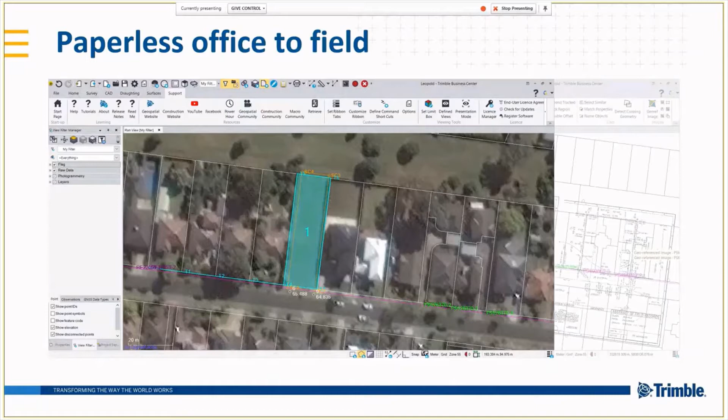Now, the pieces that we lack when we go out in the field, if we're not taking out the paper, all of these additional little descriptions that we would get. These are an example of some survey, they call them abstract field records in Victoria, but similar to a survey plan that you'd see in other states as well. These always contain a lot of extra description, and it's a lot easier just to have a look at a PDF than to be keying in all of these additional attributes and notes and descriptions on a point that you then have to interrogate in the field. It's nice just to still have that aspect.

So what we do to help facilitate that is Business Centre has tools for georeferencing images. It also has tools for georeferencing PDF and anything of that type. If, for instance, the PDF had been created from a CAD package where we get what's called a vector graphic instead of a raster PDF, then we're also able to leverage that and re-extract the line work.

These ones happen to just be a raster, so all we get is an image by itself. But even in doing that, we're able to place the PDF so that it sits where the particular parcel re-establishment was, and the scale on these is never as to scale. So what I like to do is just position it relatively. You get most of the detail that you need without having to occupy the entire sheet space.

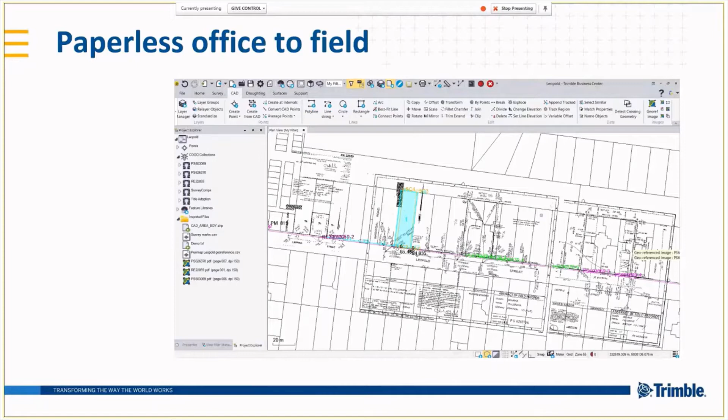And there it is overlaid, a little bit easier to see where the map base has been overlaid and also the existing surveys.

So now when we open up Trimble Access, what we start to see is our cadastral map base as a background, and these are applied in this case as an active map, so the line work is selectable, although it's rarely to scale so that wouldn't be usable for re-establishment. The map base is always made a little bit ambiguous, and the accuracy isn't down to the level we'd want as surveyors, but it's quite good as an indicative way of working.

But you can also see here, with a slight transparency applied, the survey notes as well. So here we've got our survey. It's down Leopold Street. This particular survey was in reference to this parcel, so I've scaled it based on one of the sides there, so we get roughly the right dimensions.

We can also have a look while we're in the field, and normally we'd better check what the next image is. Yep, here we go. We're connected to a GNSS, and we can actually walk over the map, which means we could roughly see what the descriptions were for these survey marks as we walk along out in the field, for these being might be a rivet or a chisel cut or some other survey mark being placed.

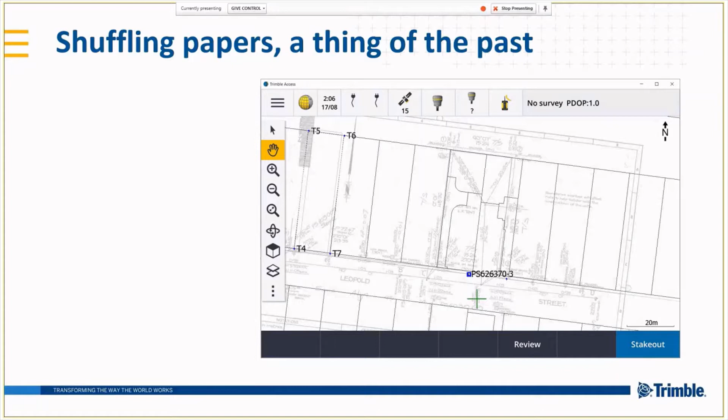So one of the aspects of this was how could we complement traditional survey with drone survey? If the actual drone survey was able to be processed a lot quicker, then we may be able to leverage some of the deliverables coming from that out to the field. But that doesn't exist yet, just because of the limitations of uploading and downloading, and also computing those deliverables.

So I've replicated what the workflow would be, but it's still a decent way of looking at how these things can be utilised, and you might find an application for them as a feedback loop from survey processed in TBC and UAS Master, and then pushing back out to the field.

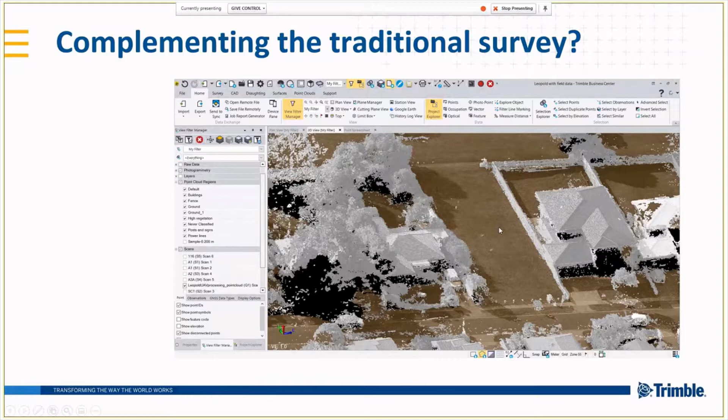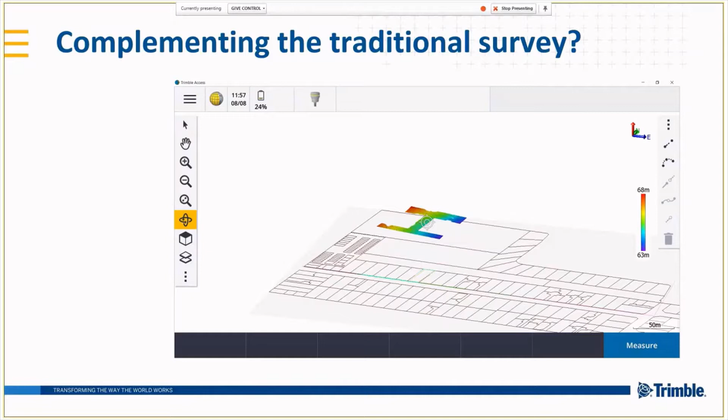So in this case, you could see the drone survey over this particular parcel, and we get some surrounding information as well. And then what we're able to do is create a surface from that and send it straight out to the field, so that we could be working with a relatively accurate surface to begin with if it was prepared with an RTK drone. And then as we work, we complement that and start to build it up, so we see a bit more information coming through.

Now, with a number of instruments that we have available, the S series from the S7 and S9, and also our flagship instrument, the SX10, we also provide a function we've copyrighted as Trimble Vision. It's an embedded camera so that we can see what we're looking at on the controller as what the instrument is looking at.

And it also helps to provide documentation for what we've actually done in the field. I think that adage of a picture being worth 1,000 words is quite valuable here. If you've got surveyors out in the field preparing detailed field notes, sometimes I've used things like Google Street View when information didn't quite make sense back in the office. But with this vision technology, you're able to capture panoramas to help with what's being documented in the field.

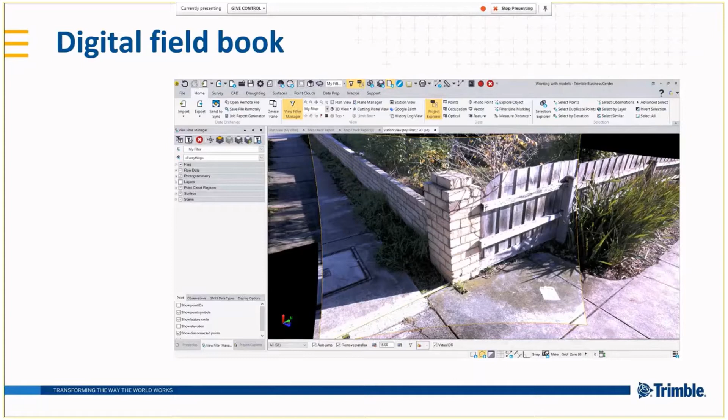If necessary, taking a step further, you can also use a scanning function. In this case it's done with the SX10, but the S series, S7 and S9, also provide a very light duty scanning function, so if additional information was required rather than just discrete points, we can capture that, see it overlaid with our imagery, and take that back to the office for analysis too.

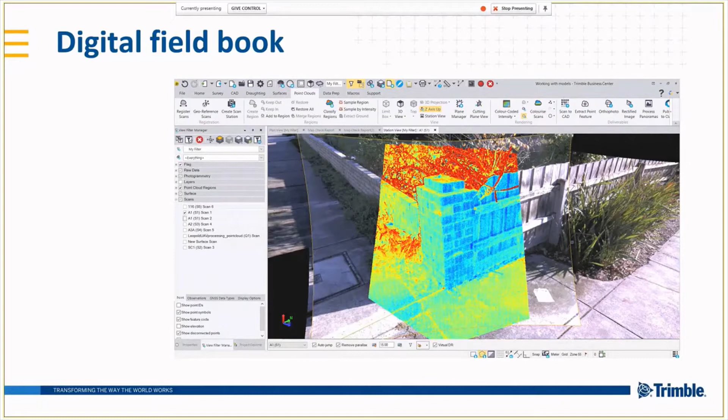One thing I find interesting that doesn't get used more, perhaps it's just around knowledge of how these tools can fit together for documentation and quality assurance - in Victoria, the way I was trained on doing cadastral surveys, we would always take some sort of independent check, and a lot of the time this is done through a taped offset.

So in this regard, we've taped our offset. We're actually using the SX10, facing down and aiming the instrument at the tape. In this case I've captured a photo without the crosshair applied over the top, but I have stored a point so that we get an exact point overlaid at the same orientation as the image. So we could see that this was measuring 1.03 meters.

Yeah, and able to use that as a tool just to verify that there haven't been any typos out in the field. And this all flows back seamlessly to Trimble Business Center just via the synchronizing embedded in Trimble Access. That's consistent for - although the TSC3s don't work with SX10 - there is also that synchronizing function and vision function that works with our more traditional S-series instrument with the TSC3 as well.

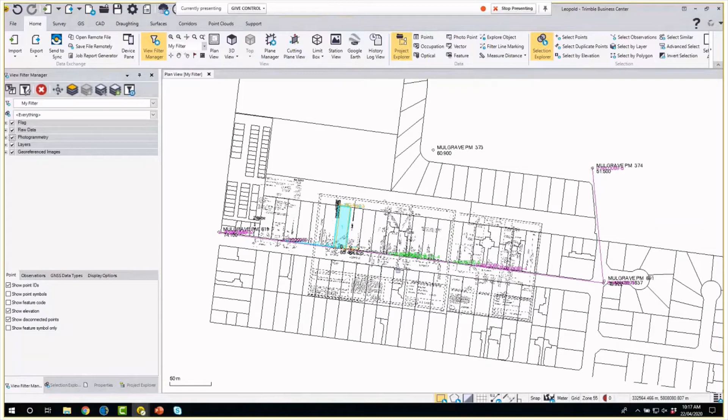So this was the job that was prepared for taking out into the field. And if we zoom in here, you could see how these have been placed and some of the detail that exists on the PDF so that we can actually utilize this information as well. It gives us a lot more than just what we would generally key in, starting from scratch of keying in surveys.

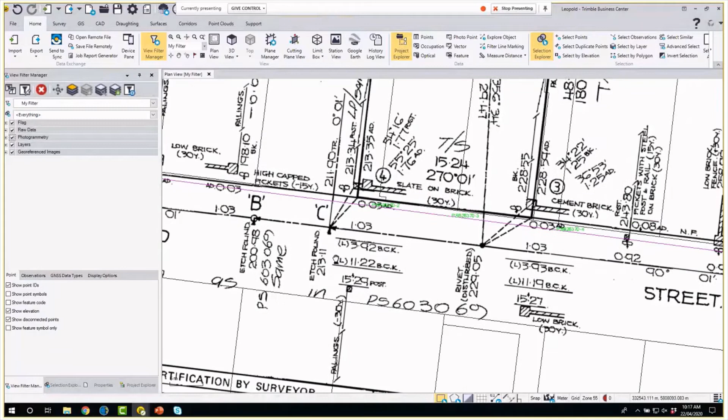We haven't quite caught up with New Zealand in being able to leverage an automatic download of all of this survey information from a database, but we'll get there one day. So for now, this acts as a pretty good way of doing these things. We just drag and drop the PDF, and what you'll see is if you drag a whole PDF in and it has multiple pages, each page comes in separately.

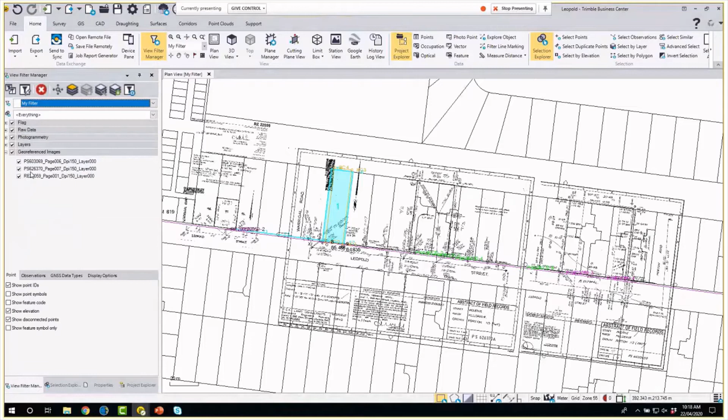So I've got 3 different surveys here, but you can see I've taken page 6, page 1, and page 7 from these, and I've only georeferenced and retained the pages that I actually want in the Business Center project, just to help clean up the data so that I'm not filtering through things that I don't want and leaving legacy items there that aren't required either. I'll just turn off some of the layers and only keep this. As you can see here, it's nicely georeferenced in.

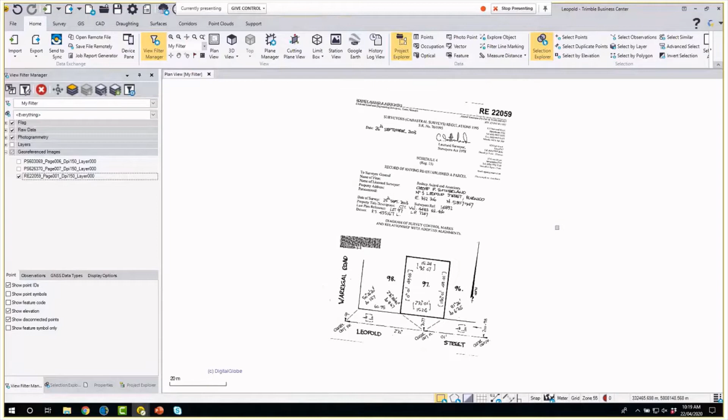One of the tools that we can also use to assist with this, if we didn't have any survey information to start with but wanted to take some of this information out in the field and use a more paperless workflow - just down in the bottom tray here, we've got our map views that allow us to toggle the background map. And if I zoom out and let that cache for a moment, we'll see that it starts to be overlaid and applied here.

And we can set things like, I'll jump into here, this one, properties. We can apply transparency here just to help with seeing where that is in its real world location as well. And obviously you can see here the scaling of these particular documents is quite a bit out, just to be able to fit on a single sheet.

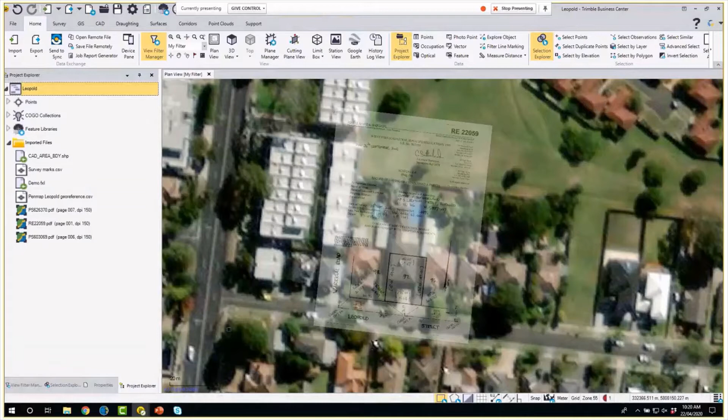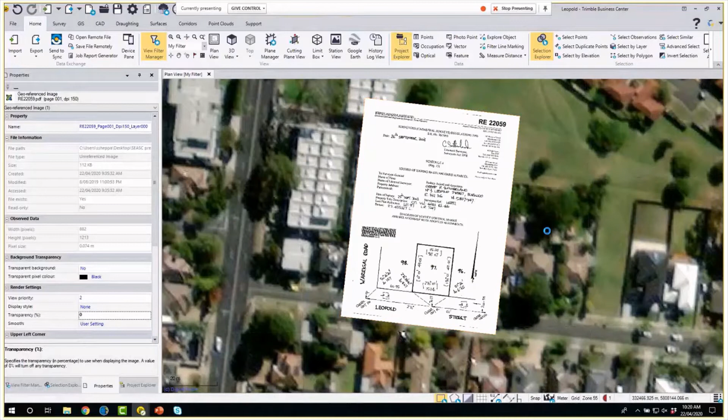If you're not aware, when we're using the background map, we can also come up to the properties of the project, and we can change that from the DigitalGlobe imagery you're seeing there to Trimble Map View, which is effectively like a Google Maps version. So you get the actual street labeling and generic parcel identification rather than what we're seeing there. Okay, so I'll change that back to have no transparency applied, and I'll remove this.

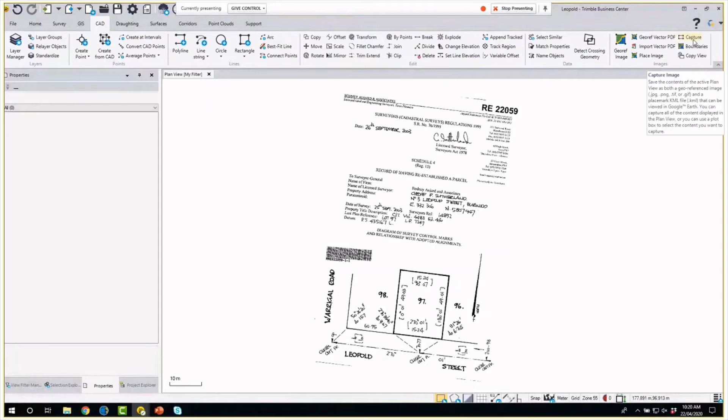So when I've done this and wanted to take it to the field, then just under the CAD tab here in the ribbon, we have this little button for capture. And it can be capture for anything. I quite often use this to capture a nice three-dimensional view of a surface or some stockpiles, and then apply it to some custom reports in Word that we can run out of TBC. But in this case, we're going to use it to capture a TIFF image that will be taken through to the field.

We do have a few different options we can leverage as file formats for doing this. I find that the TIFF image, although it is slightly bigger, the way that it's being stored tends to operate a little bit quicker, and you'll have less latency when you do get into Trimble Access. It is a lot more beneficial on Trimble Access in a TSC7 or a T10, something running on a Windows operating system like Windows 10, rather than the TSC3, where the size of the screen and the limitations of the computing on that device meant it had to be lower resolution, and the benefits just aren't as sharp and clear as what you do get from the newer controllers.

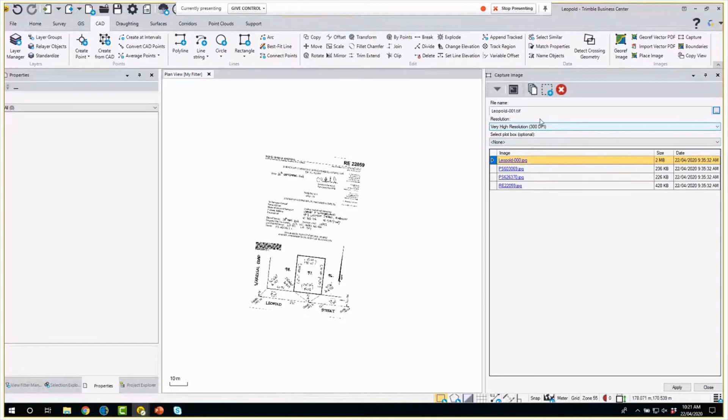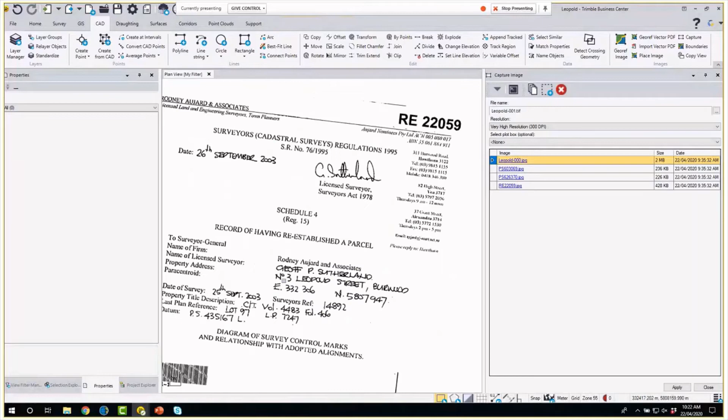Always use the highest resolution you can, and depending on what details you want, you don't necessarily need to take all of this information. You can just zoom in, and if this was all you really wanted to see, then we can hit apply and store that. Now, I'll do that for a moment. Apply, and we've just stored our Leopold-001 TIFF.

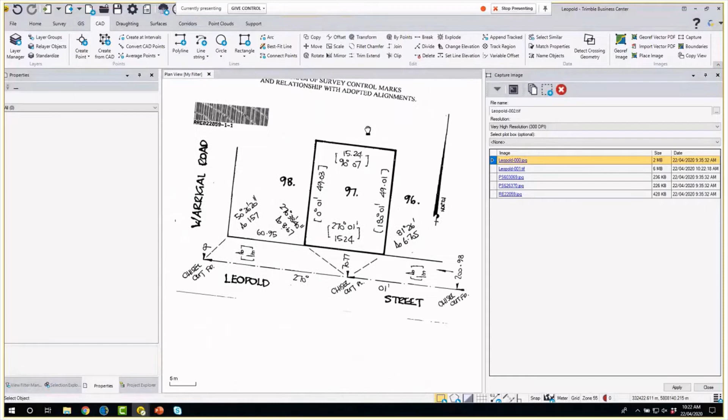If we wanted to be quite specific in how we took this information out, then we could use the plot boxes available here. I haven't created one in this instance - it's sort of a quick and dirty workflow. But if we did, then we can specify an exact boundary around this as we create the images. We can also just grab into this, see what it has stored, and go from there.

Okay, and just to explain what's in the background of these, hold on one sec. I'll go to this one, snapshots. So when we create these, what we get is this TIFF world file, and this is what makes the whole workflow nice and easy, that it just opens straight up, and we don't need to worry about where it's going to be placed. So that information gives it some coordinates, some rotations, and away it goes, so that as we jump into Trimble Access, it just works straight away.

Now, synchronizing to Access, I'll just go to Trimble Sync Manager and let that open for a moment.

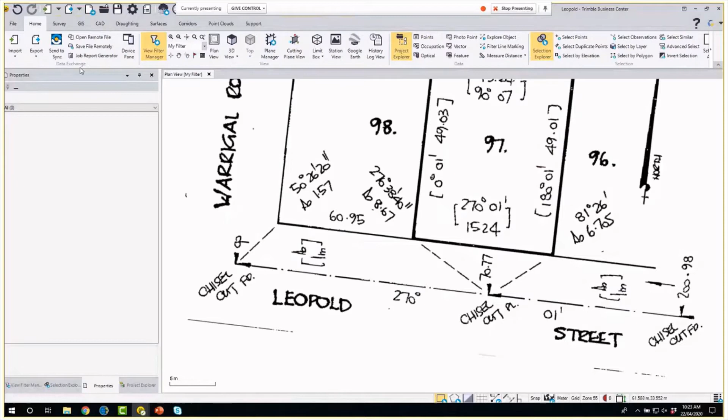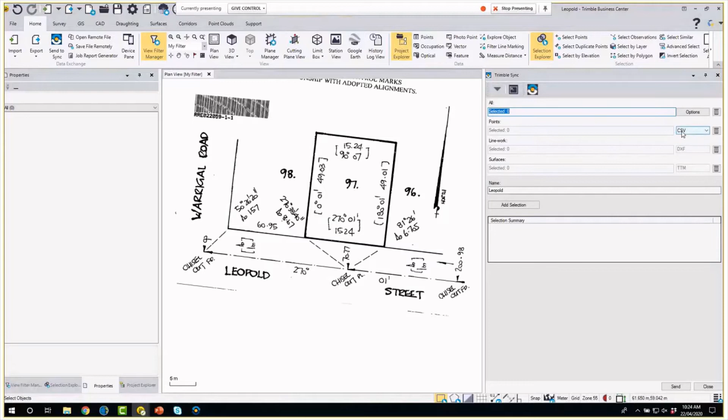From Trimble Business Center, we have embedded a send to Sync Manager function, and that will package up points, lines, and surfaces. I think that's been covered in one of the other sessions in more depth, but it allows us to link these files into a job that we're creating in the office to be sent out to the field.

Now I'll just open up this job. It's a slightly different one, but that's okay. All right, no, I don't want that one. I'll just create a new one.

So in this case, we get project files, so they are consistent across the entire project. They're not going to be in every single job that's created within a Trimble Connect project. For functions that sit outside of where we see here for points, lines, and surfaces, in Sync Manager, it just becomes a case of either clicking to browse to what you want, and depending on how you add it in, if you only want it existing on a single job, you just do it here. If you want it in the project, you do it through there.

I'll just jump to here and go to snapshots, and I just created this TIFF file here. Quite simple, just load that in, and that would now be sent, and as we start Trimble Access, it would automatically synchronize and become a background map in there.

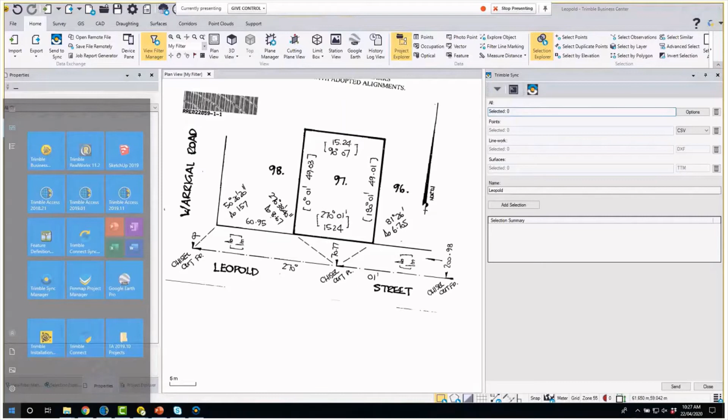I'll fire up Access just to see it on the end side of where it feeds into and what it looks like. Should get there. Come on. Yeah.

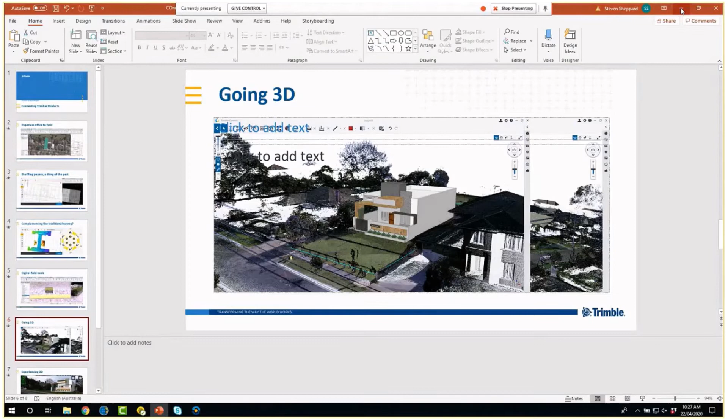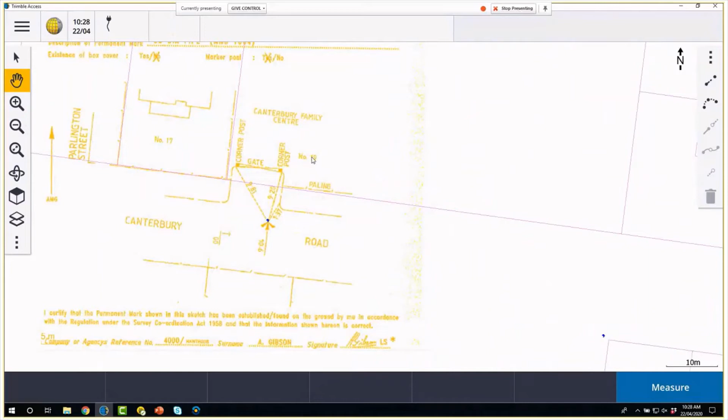Similarly for this, let's switch this one on. I did something quirky with this one, but we could see that dropping in there. Thought it might be more visible doing it in yellow when I'm out in daylight, just as a test for this particular one.

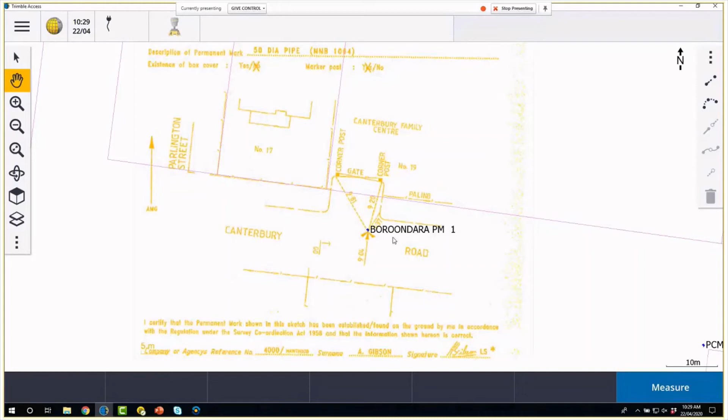But we can see here where we're able to have that georeferenced around that particular point. Put the names on. Got our point there. I've just placed it so that the points line up on the not-to-scale diagram and get a rough orientation that it's looking correct, and we can read off any dimensions to help us try and find these permanent marks, or similarly for survey information.

So once that all comes back into the office, we do that by just coming to job, and you can see this one's got a nice green tick against it. It's already in job fieldwork complete.

When these come down to the field controller, they're allocated as being new. If we make them in progress, then there's also a feedback to the office in Trimble Sync Manager that someone preparing this data can see that it has actually been started and is in progress. And when we hit complete, it automates the uploading process.

So as I was showing in the earlier part of this, the scans, the images, anything that's being associated, you could be adding in photos from the controller. You might even add in some other documents that you've prepared. You could take photos of some field notes and be able to synchronize those in the same function as well.

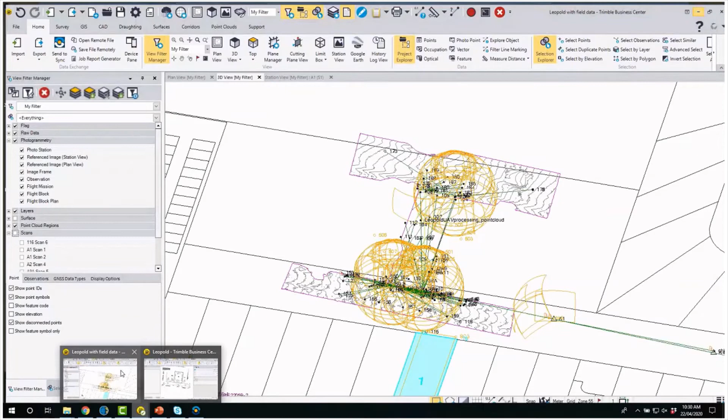And what we get back at the end of it is, I'll just turn off some of these photogrammetry settings. In the case of this particular survey with an SX10, we brought back all of this information. So we still have our map base in the background. I've switched off and removed some of the georeferenced images just to help clean it up for this presentation.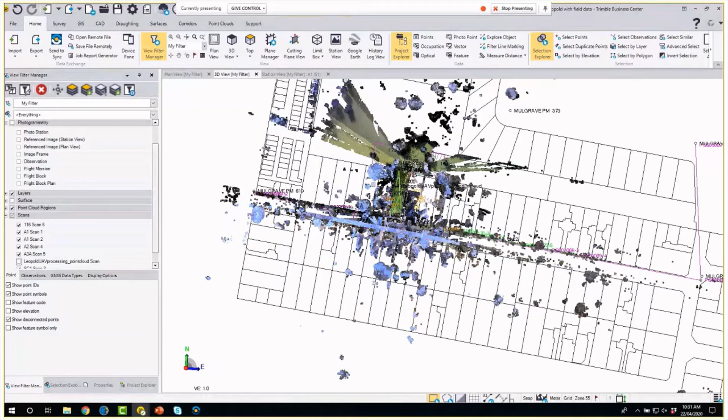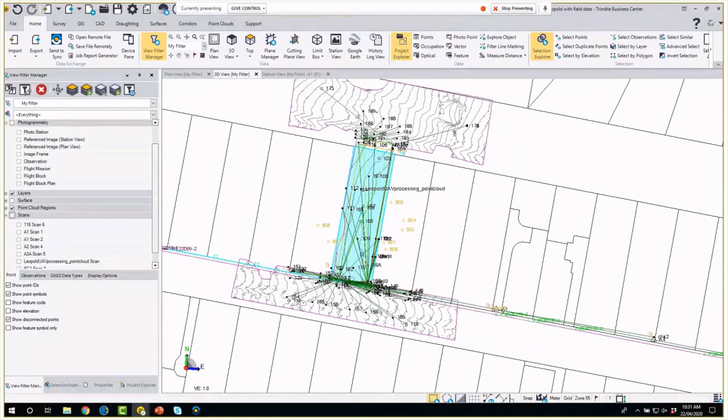But we also have all of our observations. We've got a surface I initially created from the drone that came through from UAS Master, and I'll turn some parts of that off, get rid of the layers, put on the map base.

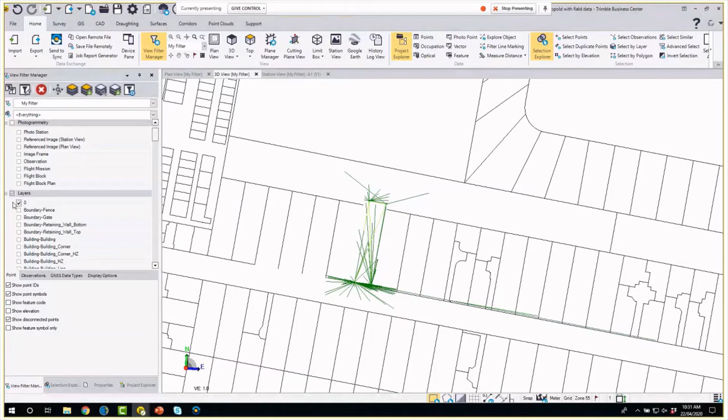Yep, and this helps us just to easily see how it's come in there. What have I done here? Lost more information than I wanted. I think I've processed the feature codes there already.

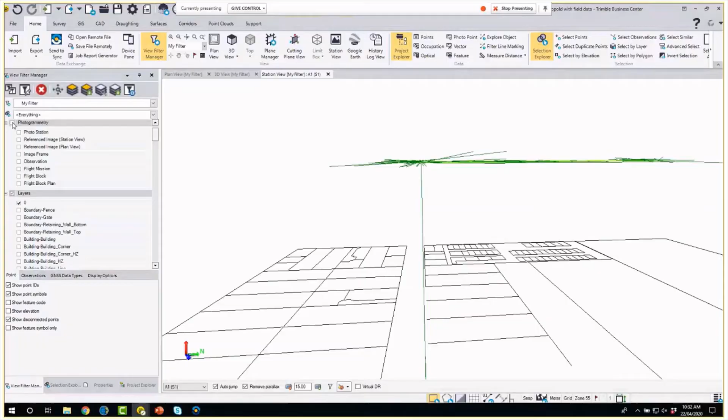But the other benefit here is we're in station view, and if I turn back on our photogrammetry, then we have that, and I'll turn off the image frames. Here we can see all of the vectors and points being overlaid in this view as well.

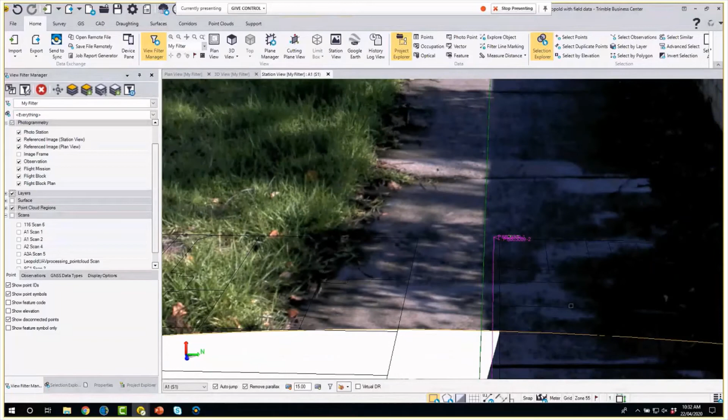Whether they're something that's been keyed in previously, so from an existing survey, I've keyed in these marks, and then I've also got some additional points that I've surveyed where I was taking check offsets.

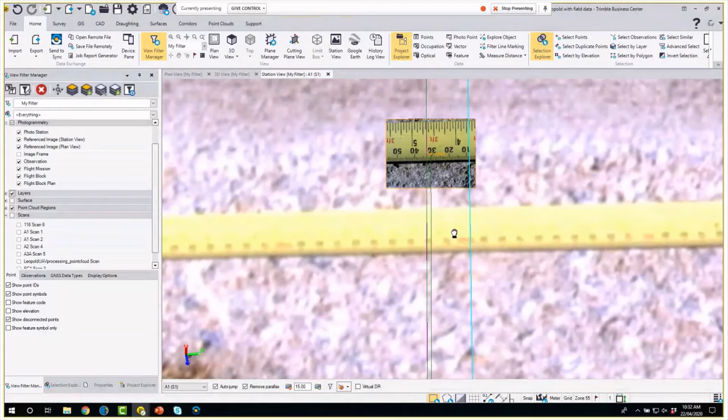We can see here through the different images available, different cameras available on the SX10. I've got my main panorama covering quite a bit of area. In this case, we did it twice, that's why there's the parallax in the images. We forgot to take the tele camera shot, but nicely documented, flowing back into the office from the field fairly easily.

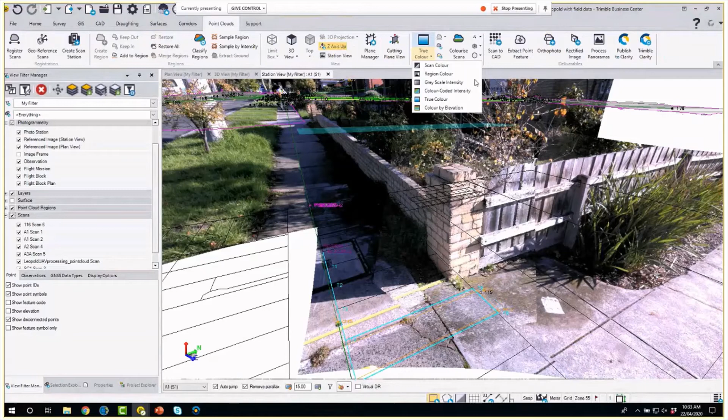So when we've got the scans on as well, and we'll just change that to color-coded intensity, we can see here we're able to complement the discrete points that we've surveyed along with the imagery with some laser scanned points. There I go, walking up the street as it's capturing its images, making sure we're getting the most out of our time.

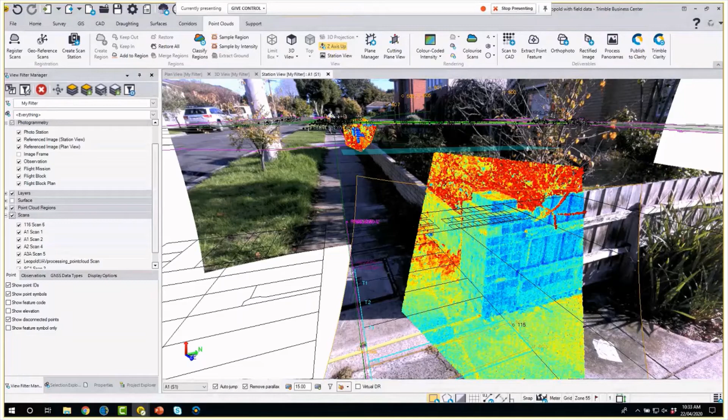Now, for taking this a step further and using all of this clever information we've got and visualizing, what we can do is... a little bit too bright for my eyes this early in the morning, we'll go back to true color.

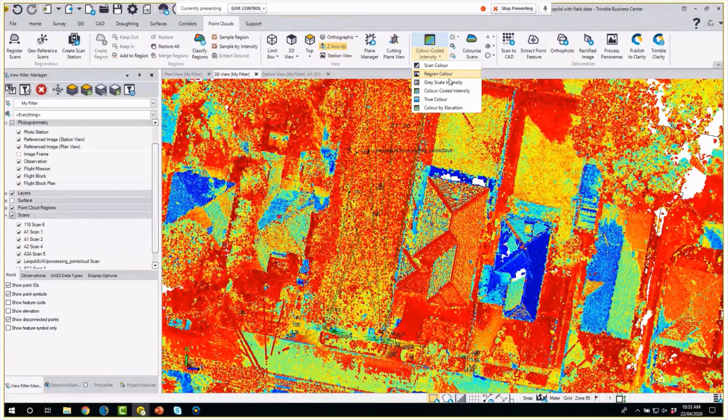What we can leverage here from a design aspect is TBC has an ability to export SketchUp files, and we could do some designing in here or house placement to be able to more easily figure out what the overshadowing problems are here. And something I'll add in that's just been recently released is SketchUp's Scan Essentials, which allows all of the point cloud to be dropped into SketchUp and modeled from SketchUp directly. A nice little tool for those working with scan data and designing and modeling in SketchUp.

Now, when we do that, it makes it nice and easy for the architects to be able to see it. But what we really want, and what I think we've got some great tools that we can use and connect to in the Trimble portfolio, is being able to display this incredibly geometrically rich data set. It has every geometry in there that we can see by line of sight, either from the scanner in this case or drone as a combined data set. And also station views as well will come in.

It's Trimble Clarity. Now, some of you may be familiar with Trimble Clarity version 1. Last year, we basically went back to the drawing board a little bit and rebooted that particular platform so that it was a lot more beneficial in what it would do.

Now I just need to pin or unpin this toolbar. How do I? No, I'll assume can't unpin that at the moment.

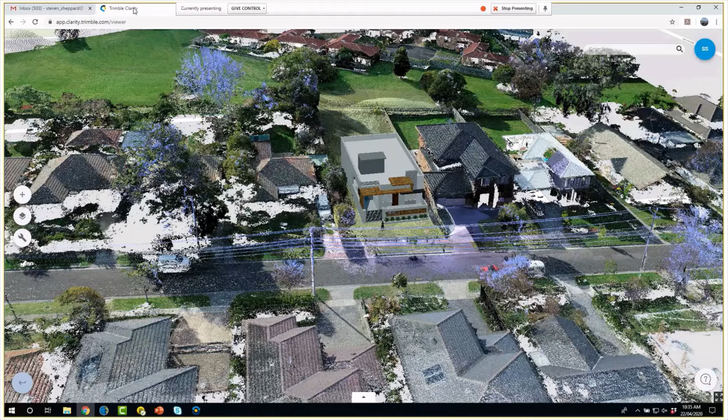So that when you want to share it with other people that don't necessarily have any viewing software like a TBC or a RealWorks or any desktop variety of point cloud viewers as well, it allows them to just log into this web portal and actually be able to come in and see all of the measured entities and what the existing environment is.

And in this instance, I didn't design this. I've cheated and gone to the SketchUp warehouse because I'm no SketchUp ninja.

The house can be dropped into place, and we can get a better feel for how the designed build is actually going to interface with the existing environment.

Potentially, what you could also be doing here—and I'm surprised more town planners aren't asking for data sets like this rather than PDFs and things that are somewhat spatially vacant. They seem to lose a lot of information.

We could actually be modeling the overlooking and overshadowing into here as well, providing that in a way that anybody can come in and see what the physical effect is on the ground, to get a nice, easier feel of how things are operating.

And within this, we can also measure, take some offsets. We can click through and cut through this so that we can see a quick cross section.

And when we have the station panoramas in here as well—actually, let's chuck one of them in at least. This one will do.

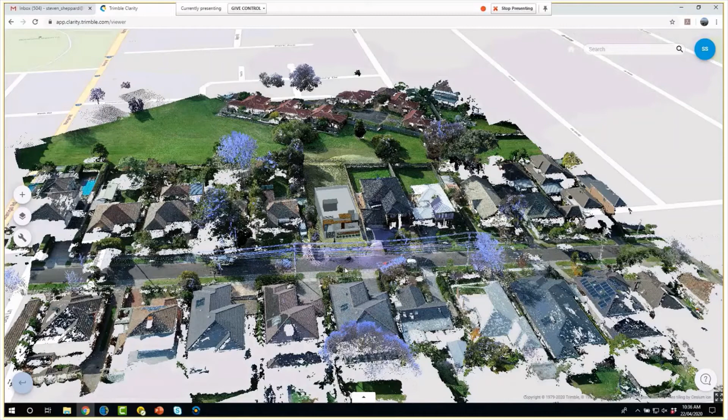Shouldn't take too long if I'm only sending the one image, even when doing a web call. Hopefully, fingers crossed, it doesn't lose it. Waiting for that to go. Here we go—initializing, sending to queue, and then it will upload it. We'll check back on that in a moment to show you the station view.

The other component I think we can connect into here, for this particular survey, I used SiteVision, and I'll jump down to the slides deck here. So this is the same location, using SiteVision to go out onto the site, have the 3D model placed

and georeferenced where it should be in the world. In this case, this line work—I should have removed this, but it was at zero. It was never at the correct elevation, so I'd roughly brought it up to where it should be visualized, but it does create a little bit of a parallax effect since it wasn't quite at ground level.

It allows us to walk around and actually look through windows, see how a design would look when we're out in the field, rather than trying to interpret a flat paper plan sheet of what things are going to look like—we can actually wander through this. And similar to Clarity, where you're seeing the design versus what we've measured as the existing conditions, here you can walk out and see the existing conditions and the relationship to the design.

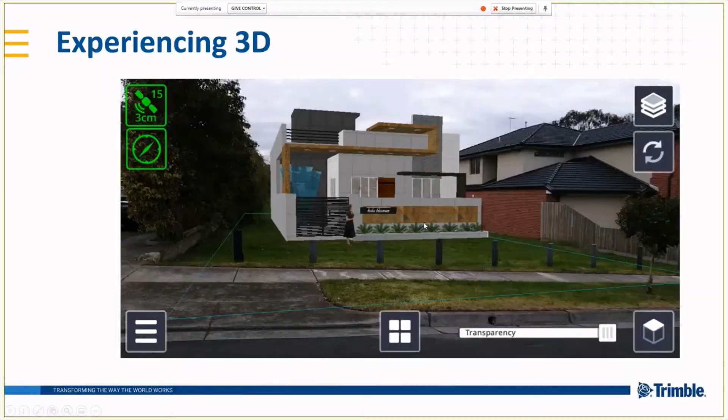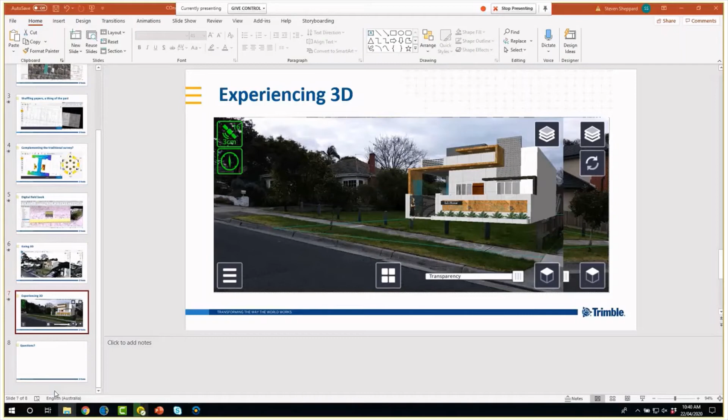I'll jump into a quick video here because it ties into the connecting idea that we've been talking about.

So this is what we see in the field when we actually run SiteVision, for those of you that haven't had a demonstration of it at the moment.

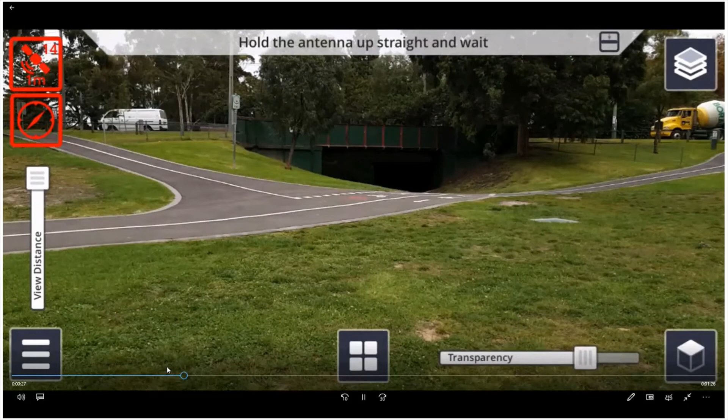We connect to our Catalyst antenna, jump in, and prepare a model. We can load any models from Trimble Connect and down through. These are easily georeferenced with a neat little SketchUp plugin or through Trimble Business Center, and it takes a variety of different files. It also has a lot more options for georeferencing when you're in the field, if you hadn't done the easy work of georeferencing it in the office.

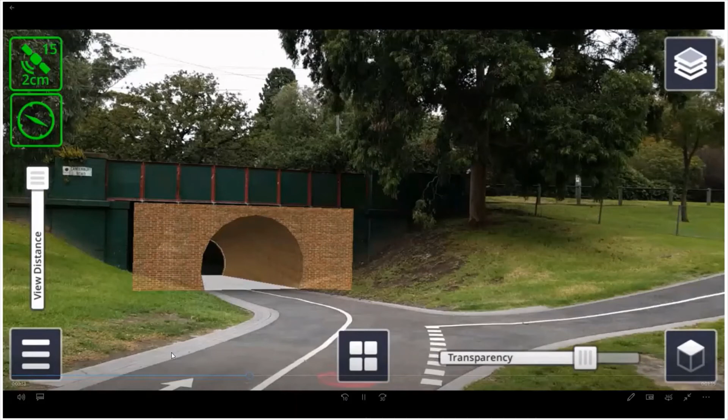But in this case, you can see here a little tunnel design that I've put underneath this bridge abutment, and we can fade that in and out. It allows us to get that really immersive take on this.

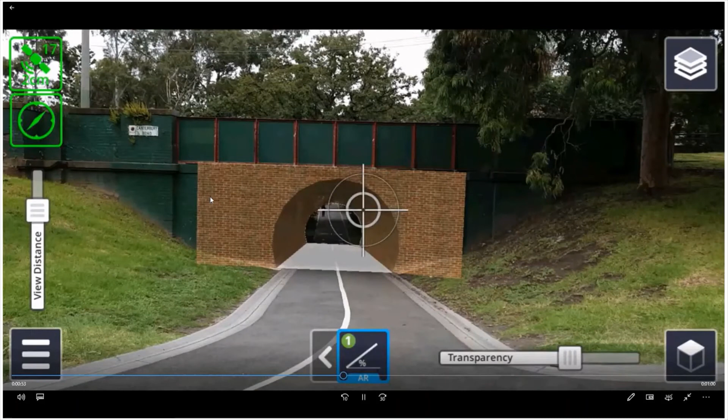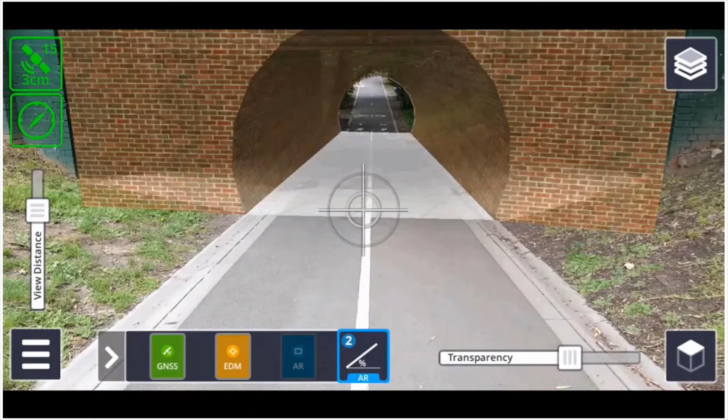And this is still using the same things we've used so far. The initial survey was done with Trimble Access, positioned with an R10 rover, so that when we did our design, placed the design, creating a quick calibration file from Business Center and loading that through the SiteVision workflow, it drops straight into where it should be.

And we can actually, in this case, take some quick offsets from the design to the physical environment, which makes it a really nice tool because it has that EDM embedded, and we're taking some components from our previous survey, combining that with the data.

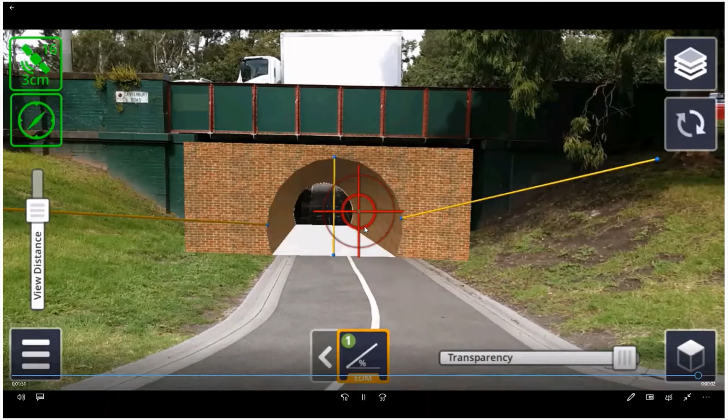Now these measurements—this is where we come back into connecting the products. These measurements are able to be synchronized, and they give us a bit of information. I'll just jump out of this video, go back to documents, sorry.

They give us a little bit of information that is usable just for a QA afterward. You can see here that I've made measurements at a certain time, certain date, what the name was, how we performed these measurements, so whether they were from AR, our augmented reality, or from the actual model you were seeing there, to an EDM shot.

It also gives us some information on the GNSS at the time. It was measuring well, but we're starting to lose some of our azimuth constraints for the orientation of the device, which can happen in different environments. So these first couple were all green, the next ones might have a little bit of error because they've moved to orange.

Now, looking at this by itself doesn't give you a huge amount of information other than the physical measurements. But what we could do in Business Center to close out this loop of taking pieces from our SiteVision is write a little custom import format editor where we can just take through, for instance, the easting, northing and elevation. Then we'd have these points come in so we can track what measurements were made in the field. We could add in a code or any other documentation around that.

So it can act as a complete loop as well, that we're going from office with our initial survey to field, we're going back to office again, doing some designs, and then flowing that either to a cloud platform or to the field again for inspections. And some of those inspections also flow back to the office as well.

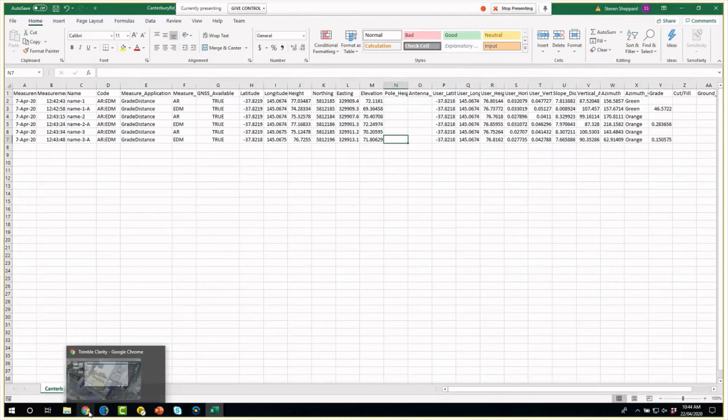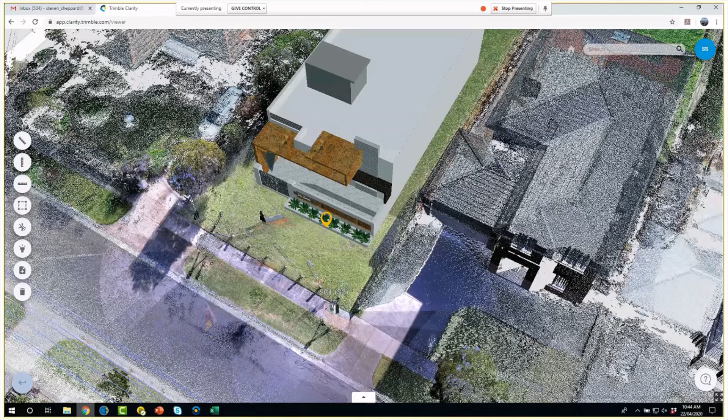So probably the only component I missed in discussing this workflow of connecting all of these products was the photogrammetry section. Now I'll touch on that quickly, but I won't go into too much depth.

For Trimble Business Centre, we can work with a number of different drone manufacturers: SenseFly, some of the older legacy Trimble drones from when we were a drone hardware manufacturer. We also work with Delair, with Wingtra, and we're making some headway on working with other third parties as well, so that they can be processed in a nice simplified workflow within TBC, which helps us connect everything.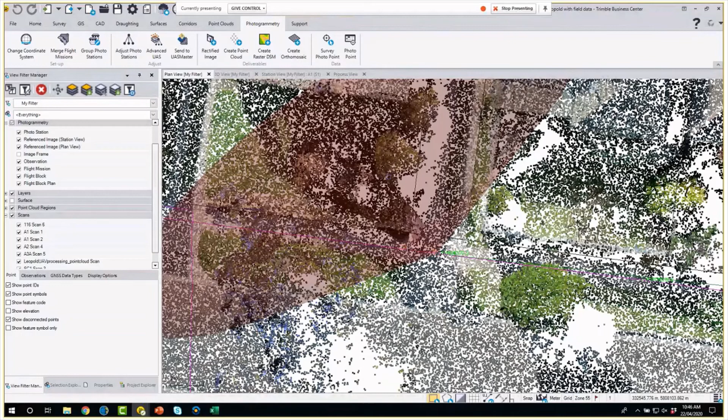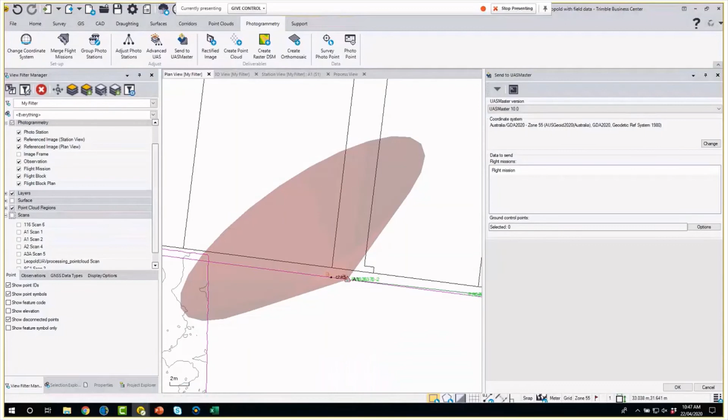But just within the Trimble portfolio, if you need a bit more power in your photogrammetry workflow and a true photogrammetric package with a lot of additional tools, then we can use Send to UAS Master. This is how I process this in particular, because the nice thing is if we start here from our field survey where we may have collected our GCPs, we're picking up the coordinate system. I can specify if I've got a couple of versions of UAS Master which install I want. And then for ground control points, I'll just turn off the scans and set the point IDs, feature code.

Then we can select similar and grab all of these GCPs. I actually digitized some off the scan for roof lines just as a bit of a test case for processing. We grab all of these, we hit OK, and that seeds our photogrammetric processing.

When we're finished in UAS Master, we bring that back into TBC seamlessly, where we don't have to worry about the coordinate systems getting them to match up. It's handled because it's Trimble talking to Trimble, and it just matches, it works, makes our life easy. That's what a lot of people are after: a simplified workflow, which although it's a true photo package with some additional components that isn't for everybody, the workflow around Business Centre and sending back and forth becomes quite seamless in preparing that.

Okay, so that covers off most of what I wanted to discuss around connecting the Trimble products, being able to utilise Office and Field and a couple of different field softwares in there with SiteVision and with Trimble Access. I didn't get into details, but I think I'll discuss it this afternoon on the Trimble Access session called Integrated Surveying, which is one of the things that really helps bind Total Station and GNSS in what is a very nice workflow. I don't think there's many other manufacturers with such a seamless way of connecting GNSS and Total Station for initial site setup and difficult environments where efficiency may be required.

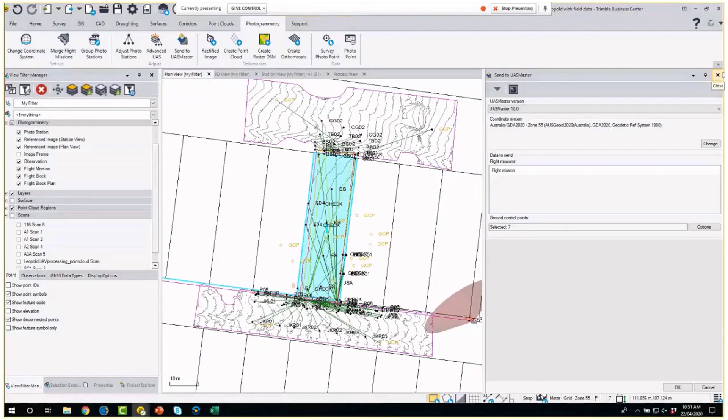We have a nice workflow set up that when we want to send it out to the field, we can use the Send to Sync function. If we weren't using Trimble hardware in the field but still wanted to package it, we're still using the Connect platform, we can do that—it's just a slightly different synchronizer.

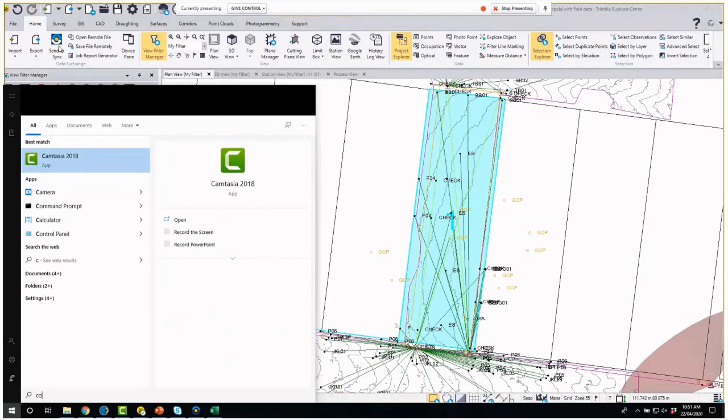So there's this one called Trimble Connect Sync, and I apologize for the amount of 'connect' and 'sync' in all of these titles—they've become a little bit annoying at times, but it's all right if you've got an eidetic memory, which not many people do, so we all struggle with it. Now everyone will be thinking you've got the same password—it's all dots.

What Connect Sync allows us to do is run it on any Windows platform—I'm just running it on my desktop. We can have a Connect project where people are collaborating, so that might be our SketchUp teams in Buildings, or Tekla, or any of these other products, and we can just come in here and choose to edit. It allows me to pick a local folder I want to synchronize from. So if you're working on a project in Business Center and feeding it to someone in the field who doesn't have a Trimble product, so you're not using that Sync Manager workflow, you could just point this to that particular local drive, have it up in the cloud, and they can run this on, say, a Panasonic tablet out in the field, and it will push it down into their controller.

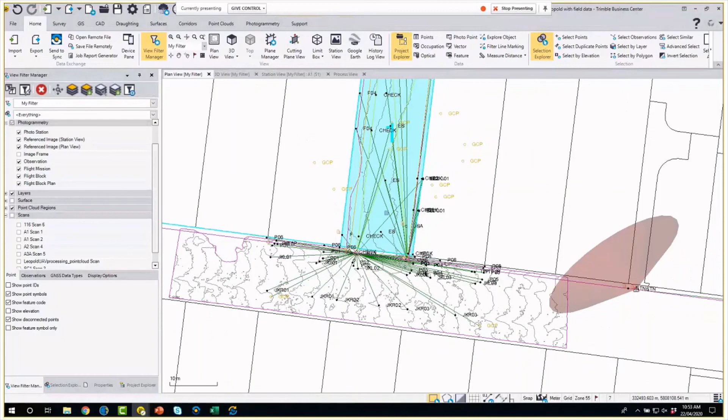Where we start to lose some information is in the clever aspects—things like an SX10 or an S-series capturing these panoramas that are exactly aligned with all of the survey measurement. There's always a conflict with how much manufacturers want to open up to competitors as well; sometimes it gets integrated, sometimes it doesn't. We would be able to take all of these observations—there are a few different exchange formats that provide that—but some of the really clever integrated pieces start to fall over.

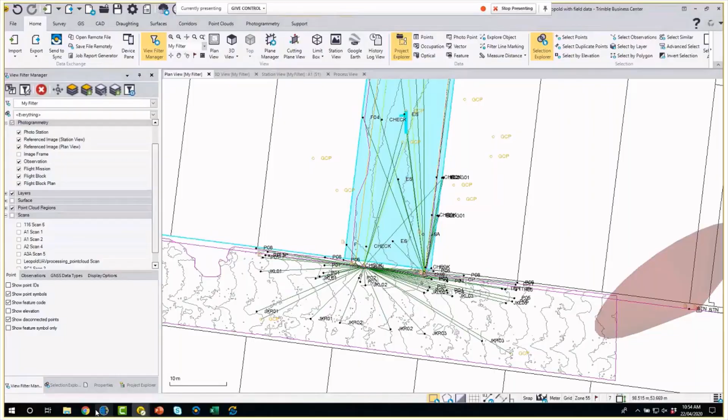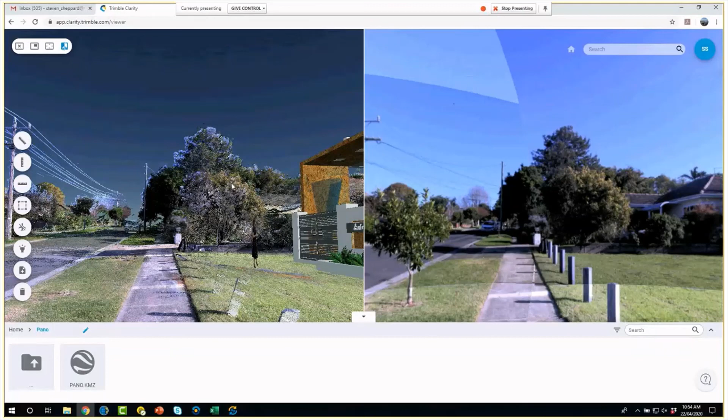Now, I haven't tested this, but from a Trimble Clarity perspective, we would be able to still take on any point cloud coming from any location. We deal with all of the standard industry point cloud formats—mainly we retile them as a particular format, but if you load up a LAS, it'll be fine, or an E57. The panoramas are using KMZ, so there probably is a way to create these, but it wouldn't be as straightforward as just a simple click in TBC to get them to flow through.

And then if people are using packages other than SketchUp for Clarity to push into the cloud platform, the industry standard, which is OBJ, would be taken natively into this particular package. So we can facilitate a lot of things across different manufacturers and platforms—you just lose a little bit of the seamless aspect where certain things are a little bit easier.